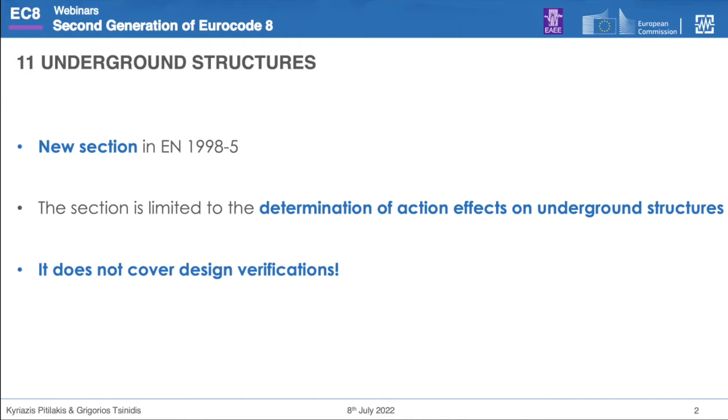It covers these subchapters: the general one, then the seismic actions, the methods of analysis, quite general, and the seismic loading. The first two are for the tunnels, the third one is for large underground spaces like parking and metro stations, which were not covered so far. We also have a small chapter at the end for culverts. So we believe we cover most of what an engineer is needing.

And there are 3 annexes. At the beginning it was 5 or 6, but we reduced it, all informative, to provide simplified evaluation of peak ground motion for the seismic design of underground structures, simplified analytical expressions for seismic tunnels, and impedance functions for underground structures. We will discuss these issues during the presentation.

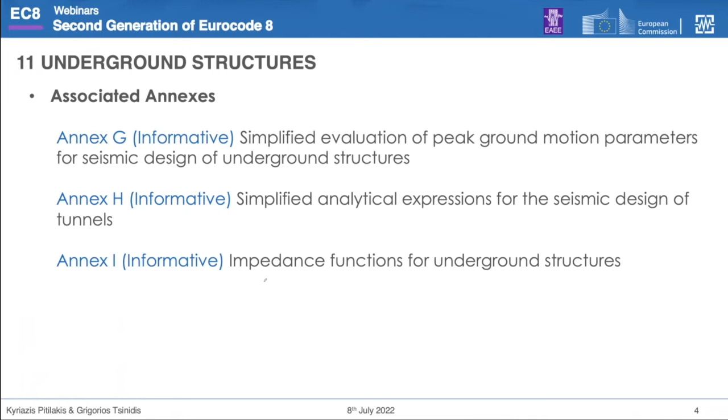Now the tunnels and underground structures shall be designed to provide seismic performance consistent with the limit states we have discussed a lot before, and of course the associated seismic actions. They should be designed against ground shaking and permanent ground deformations.

For ground shaking, the problems are not so important, but for permanent ground deformations, we will see that in most cases the code has the tendency to say: if you can avoid it, please do it.

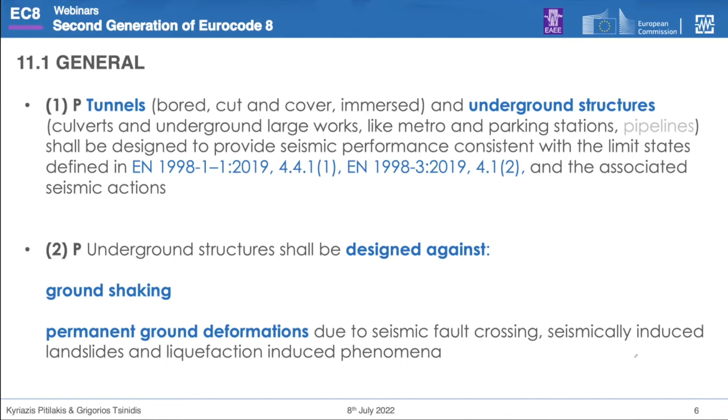Now, an important issue which may affect the design of tunnels is that it is set in a very strict way that tunnels and other underground structures should be primarily designed to accommodate transient and permanent deformations. Why? Because the imposed ground deformations on underground structures are more important than transient seismic loads related to inertia forces.

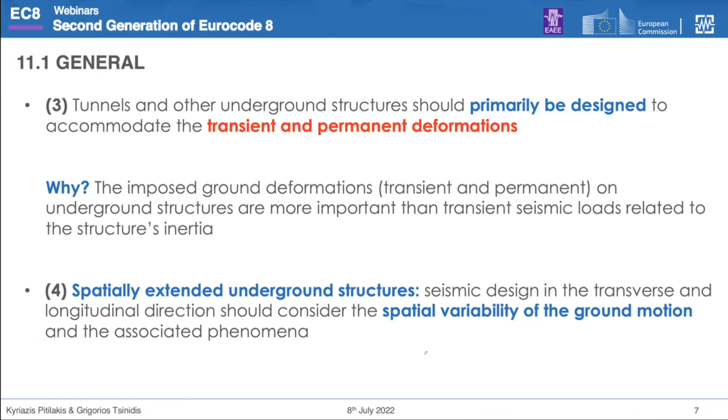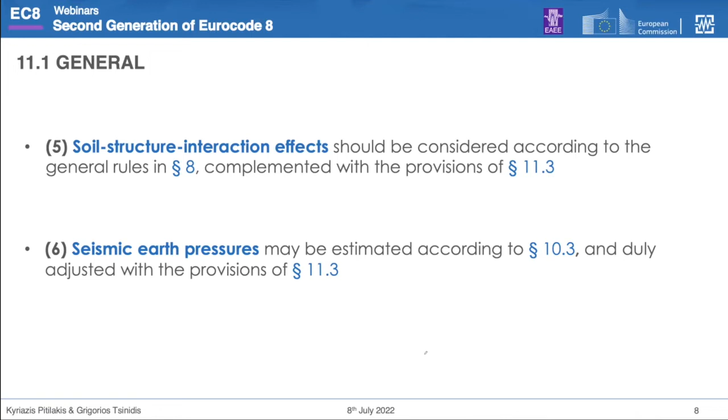It is also said, as for pipelines, that for spatially extended underground structures, seismic design in the transverse and longitudinal direction should be considered, with the spatial variability of ground motion and associated phenomena. Soil-structure interaction effects should be considered according to what has been discussed before by George. And regarding seismic earth pressures, it will be according to what will be discussed after my presentation by Luigi.

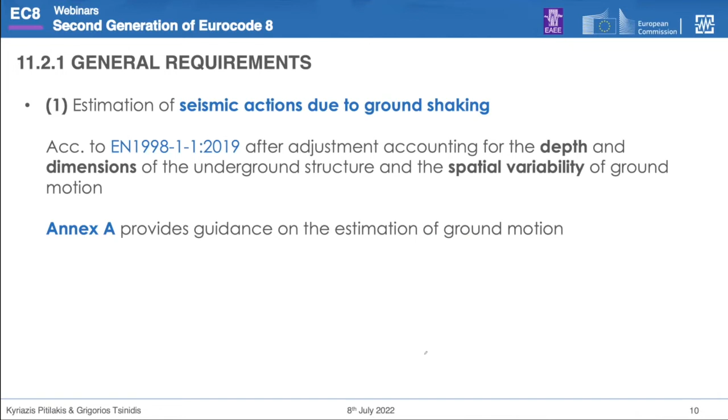Seismic actions due to ground shaking, after adjustment, account for the depth and dimensions of underground structures and the spatial variability. In Appendix A we provide some guidance on the estimation of ground motion. I'm not going through the detailed presentation of what is in the annexes, because it would take a lot of time to explain, and with the time allowed for this presentation it would be impossible.

For active faults, potentially active faults are defined as already stated in part 1 and in this part 5 as well. And we say that the necessary parameters that should be estimated are the angle of incidence, the dip, and the offset at the location of the structure.

In case of precarious slopes, and the problems that may face tunnels and culverts, the most important issue is that we have to be able to estimate the permanent slope displacements. The tunnel should be designed for these permanent slope displacements, and if it is impossible to accommodate, we should avoid this place. This is the basic idea for this design.

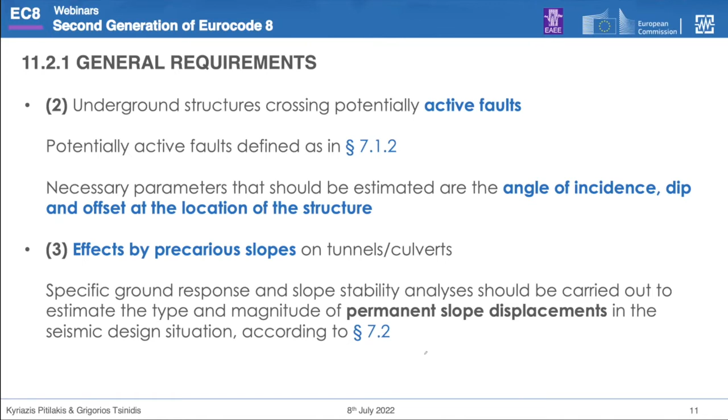Underground structures in potentially liquefiable soils follow more or less the same approach as previously for slopes or faults, but in cases where it is not so critical and you may be able to build a tunnel in liquefiable soil, then you absolutely have to take into consideration the buoyancy effects.

But there is a general clause saying that sites susceptible to hazards such as active faults, precarious slopes, and liquefiable soils should in general be avoided, unless specific design and construction actions reducing the risk to acceptable limits are adopted and made.

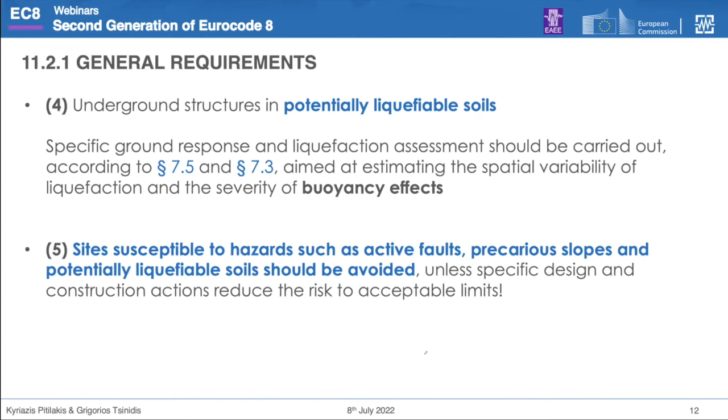Ground motion parameters should be established for the seismic design of tunnels and underground structures, distinguishing between low and moderate seismic actions and strong ground motion cases. In the case of low to moderate seismic action classes, we can use peak ground motion parameters: PGA, PGV, or displacements.

But the problem is that we have to establish, define, and estimate these values in a proper way. So the design response spectra should also be consistent with these parameters.

For the evaluation of the parameters at ground surface, at various depths of embedded structures, and at the depth of the base of underground structures, the designer should take this into consideration. In most cases, a ground-specific response analysis may be carried out to estimate the appropriate figures to use.

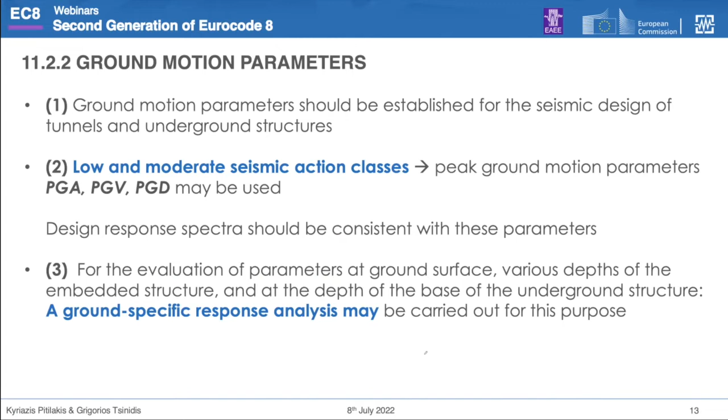For moderate and high seismic action classes, it is necessary to make a ground-specific response analysis for the total length of the structure.

There are some proposals for low seismic actions on how to estimate the variability with depth. A strong discussion in the committee was made regarding the values we could use for PGV and PGD, because they are necessary, and the variation with depth. Finally, we prefer to remain with what is proposed in Part 1, and there are some correlations there that could be used.

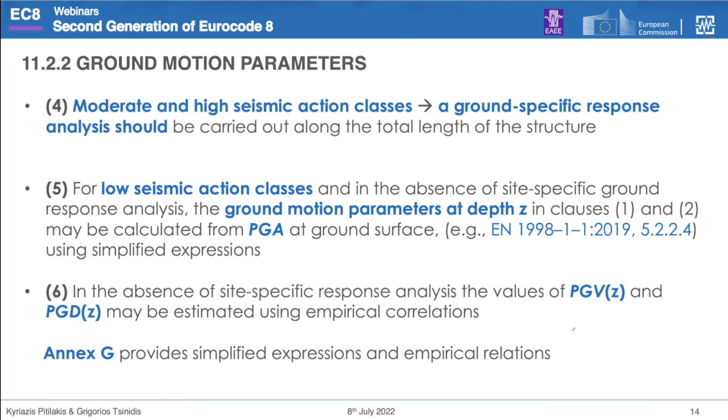In any case, in Annex G you can find simplified expressions and empirical relations on this issue, including recommendations and guidelines for the spatial variation and incoherence of ground motion, something that is also discussed a lot in the part on silos and pipelines.

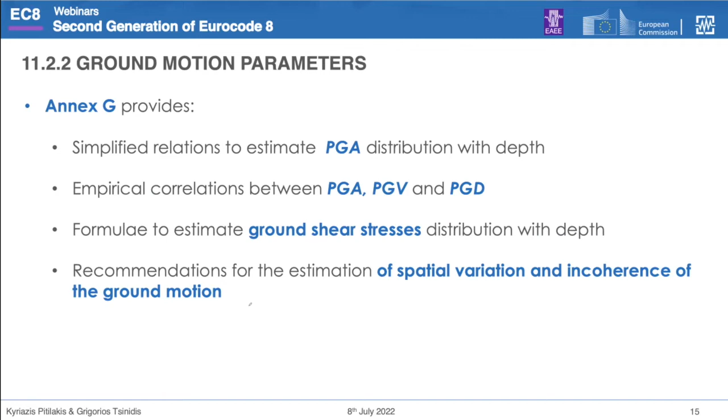For the seismic action in the longitudinal direction of the tunnels, it is necessary to use an apparent velocity, as described both in the annex, and in the way these issues are addressed in pipelines as well.

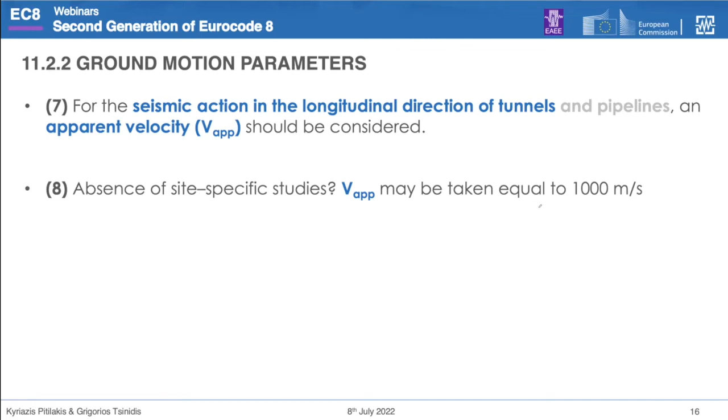In the absence of site-specific studies, which are rather rare I must admit, the apparent velocity may be taken equal to 1,000 meters per second. This is more or less what is proposed in the United States, and we do not have other arguments to modify this. It's a long-debated issue, but this number is believed to be a reasonable one.

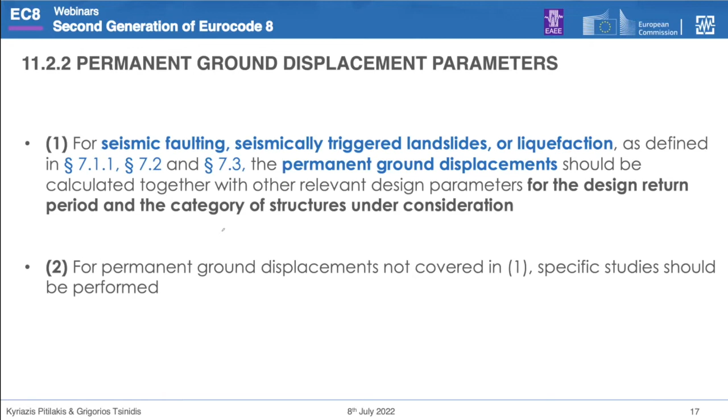For seismic faulting, seismically triggered landslides, or liquefaction, the permanent ground displacements must be estimated, and this is how the structure should be designed. We should take into consideration that these values have been estimated for the design return period and the category of structures under consideration.

Methods of analysis: for the seismic design of underground structures, the transient effect of the seismic action may be expressed either as forces in the transverse direction or as ground deformations in both directions. The effect of seismic action due to permanent ground deformation should be expressed exclusively in terms of displacements.

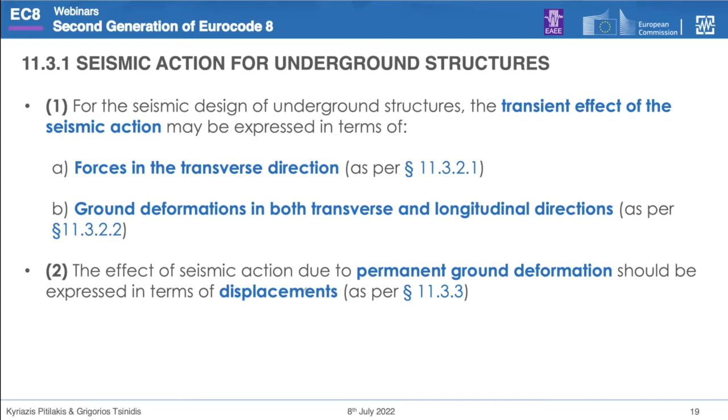An important note is that we can use the seismic earth pressure acting on the structure in the transverse direction. However, we must be quite careful, because these methods should be used with a certain precaution, and in general they should be used for shallow tunnels, cut-and-cover structures, etc., not for deep structures.

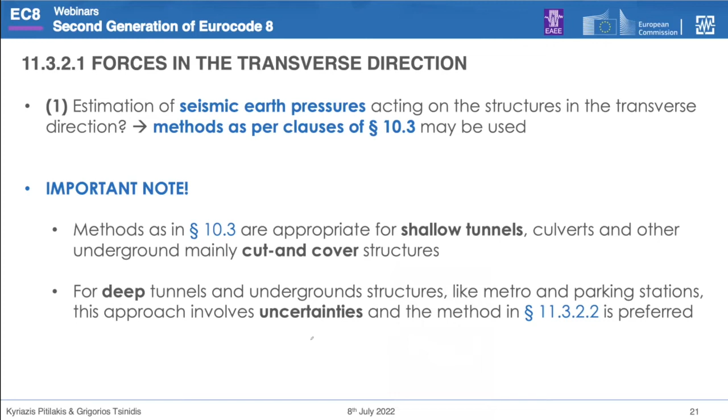For deep structures, if we use the formulas or expressions presented for retaining structures, it may involve huge uncertainties. So the methods mostly referred to in this clause should be used instead of the more classical ones that have been used until now for applying seismic earth pressures.

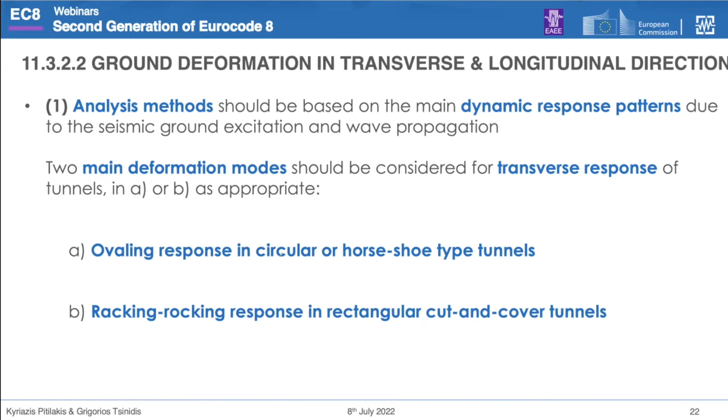The analysis method should be based on the main dynamic response patterns of the structure. The main deformation modes in the transverse response are the ovaling and the racking response, among the three or four figures I will present. This is the ovaling situation, and this is the racking and the rocking.

In some previous international codes there was only the racking effect, which is actually a shear deformation applied to this kind of structure, also used for underground spaces. But recent studies, not only here but elsewhere, have shown that in many cases we have a kind of rocking as well, so the analytical expressions for estimating internal forces in these situations now consider both racking and rocking effects.

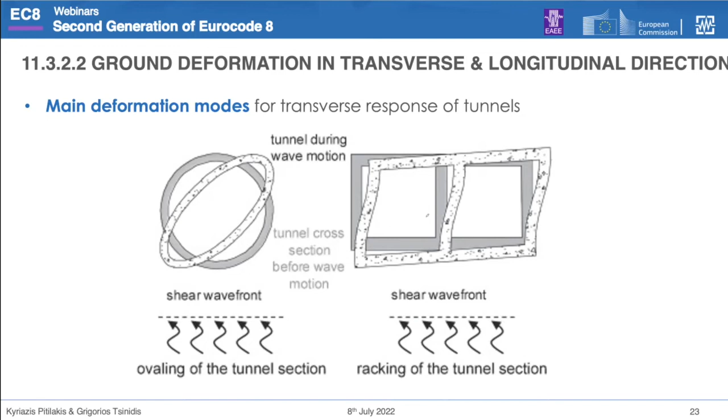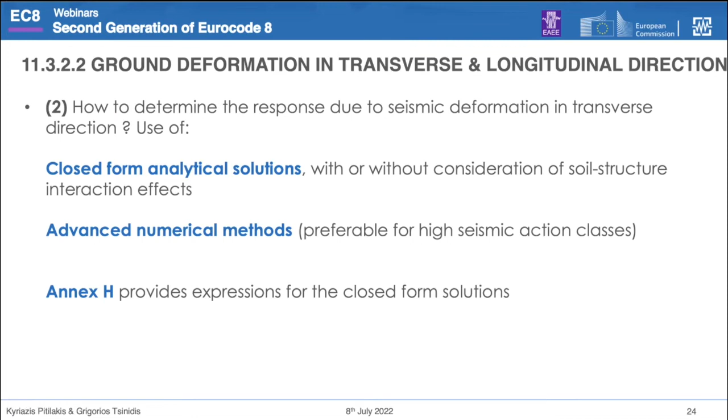For ground deformations in the transverse and longitudinal directions, we can use closed-form solutions, with or without considering soil-structure interaction, or advanced numerical methods, 2D or 3D, which is preferable for high seismic action classes. In Annex H, we provide expressions for closed-form solutions, which could be used in many cases, at least for preliminary analysis and beyond.

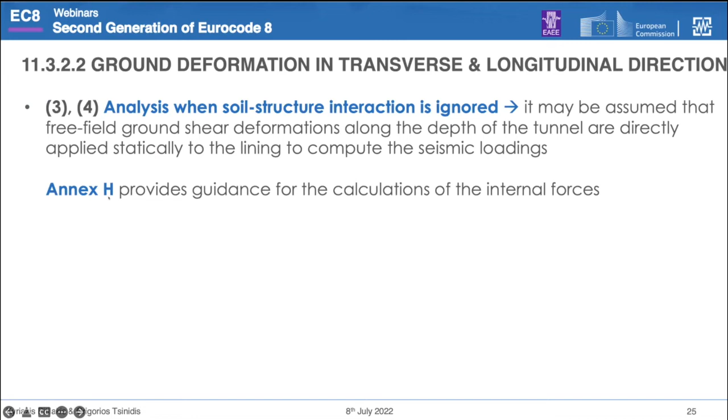If soil structure interaction is ignored, it may be assumed that the free field ground shear deformations along the depth of the tunnel are directly applied statically to the lining to compute the seismic loading. In Annex H, we provide guidance for the calculation of internal forces if we have to use soil structure interaction effects, for both circular and cut and cover structures.

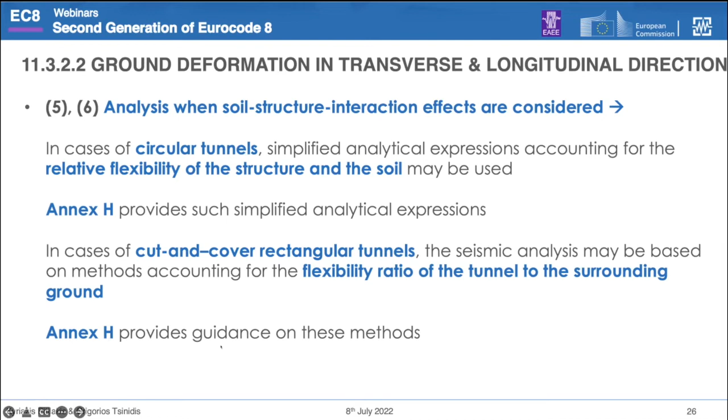Simplified analytical expressions accounting for the relative flexibility of the structure and the soil may be used, and we provide simplified expressions in the Annex. In particular, for cut and cover rectangular tunnels, this is based on the so-called flexibility ratio related to the surrounding soil. It is a methodology used for several decades now. It has been somehow improved and updated, but the essential idea is the same, and in Annex H we provide guidance for these methods.

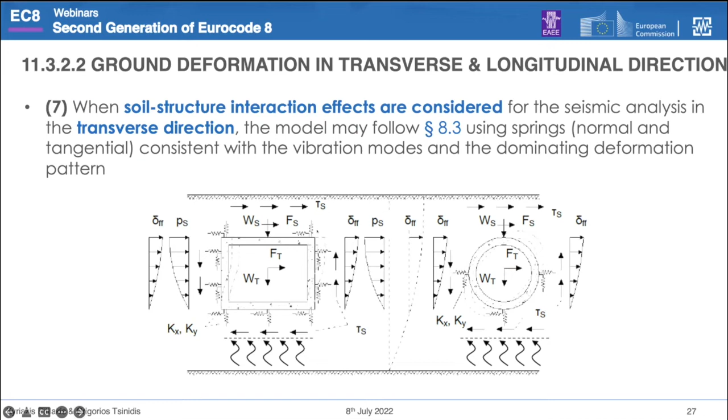What is important here is to take into consideration the inertial forces, the forces around the perimeter where structures are embedded, the type of underground structure, the deformation modes, and the seismic strain amplitude for the design ground shaking and the soil. We provide guidance for the calculation of this.

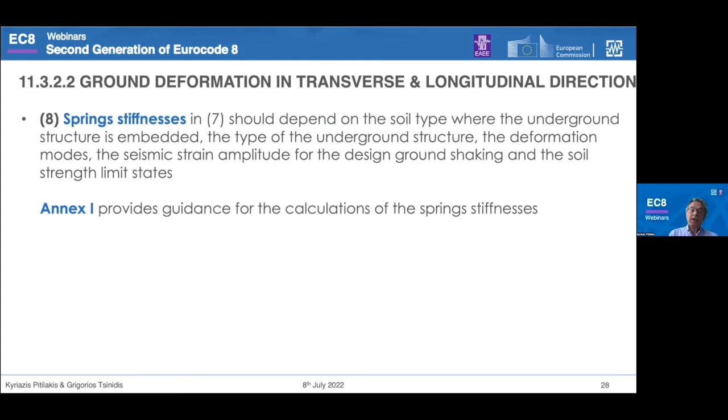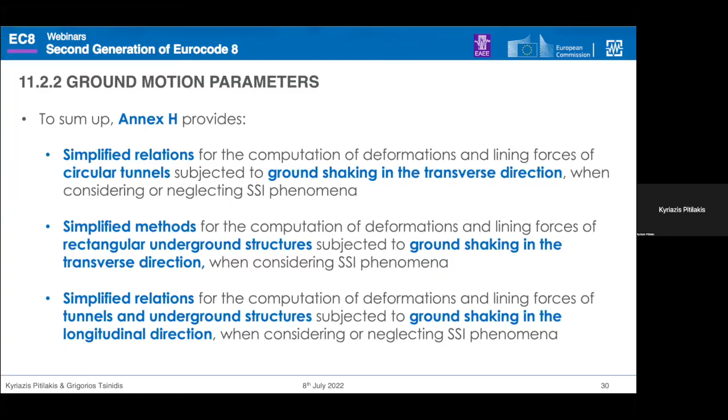I must say at this stage that there are quite a lot of uncertainties behind the estimation, but we decided to give some guidance. We must be very careful in the estimation of the spring values, the stiffnesses, and as I said in the previous slides, this is more or less what is included in the annexes.

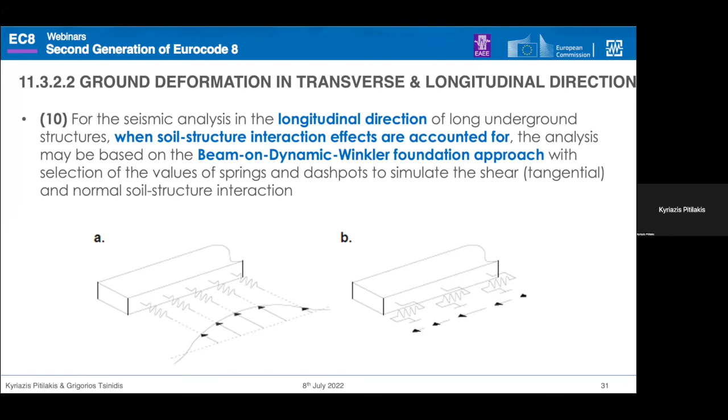Now, for seismic analysis in the longitudinal direction of long underground structures, when soil structure interaction is accounted for, the analysis may be based on the beam on dynamic Winkler foundation approach, with a selection of appropriate values for springs and dashpots, taking into consideration the tangential and normal soil structure interaction.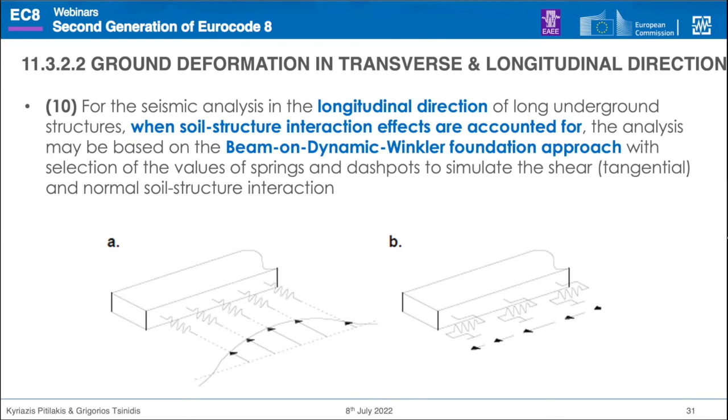Again, the values of the springs are long debated. We propose some numbers as a way to estimate them, but we emphasize that engineers should be very careful because the uncertainties may be quite high. This is addressed in Annex I, which provides guidance for the calculation of springs and dashpots.

We also put in a general comment saying don't worry too much about soil structure interaction effects in the longitudinal direction, at least, because in general this reduces the internal forces in the lining. So to be conservative, even if we don't take this into consideration, we are probably on the safe side.

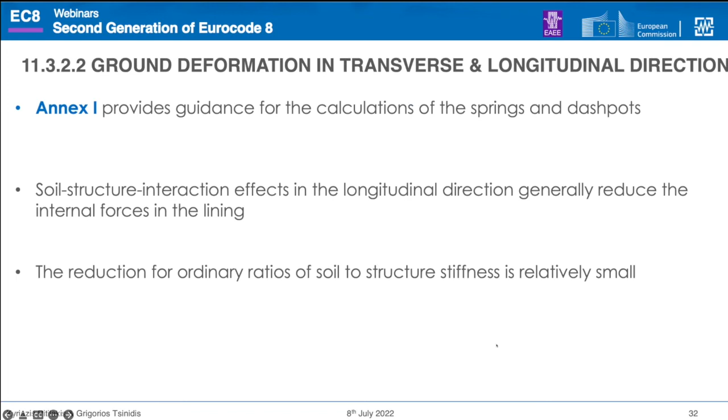For permanent ground deformations, we generally say that this is the greatest risk for underground structures. In general, it is not easy to design underground structures to withstand large permanent ground displacements. For tunnels it is easier, but for underground structures, as we will see, it is not so easy.

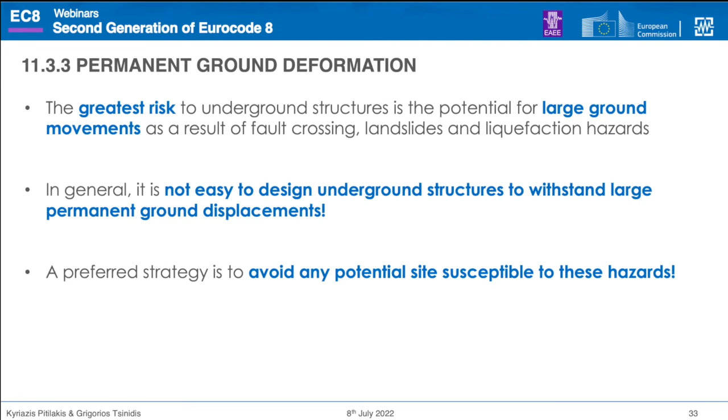But even for tunnels, we have to find other solutions, as we discuss next. Empirical relations are proposed for landslides and for liquefaction as well.

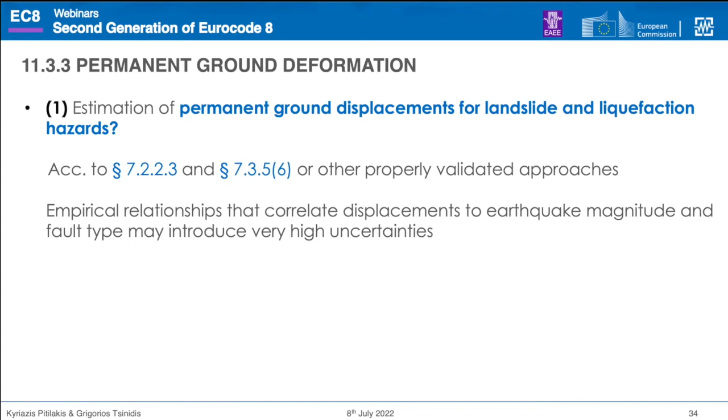Buoyancy is probably the main problem we should consider in the case of tunnels crossing liquefiable sites. And in all these cases, we more or less force the engineers to find a solution, either to avoid the issue or to take mitigation measures that should be applied.

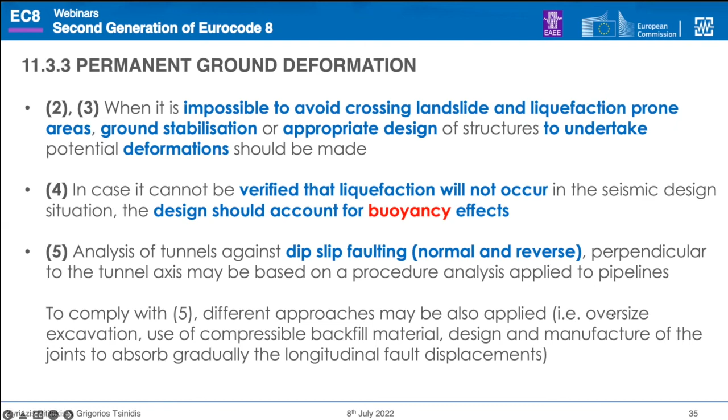What is important here is that there are some methods and technologies to have joints that can accommodate this longitudinal deformation of the tunnels, but this cannot be prescribed in detail in a code. We just say that in cases where you have to face this kind of longitudinal deformation, special devices should be designed according to the way the tunnels are constructed. So it is something that is allowed, but the engineer has to take these issues into consideration.

For strike slip faulting, the countermeasures are similar to the previous case and should be considered in order to minimize the consequences. The estimation of the spatial distribution and attenuation of the maximum fault displacements along the tunnel is a very difficult issue to estimate correctly.

So we have to use empirical relations. In many cases, it is proposed to use 2D and 3D numerical approaches in order to simulate the evolution of the deformations along the tunnel. This is particularly recommended and preferable for high seismic action classes and for segmented tunnels.

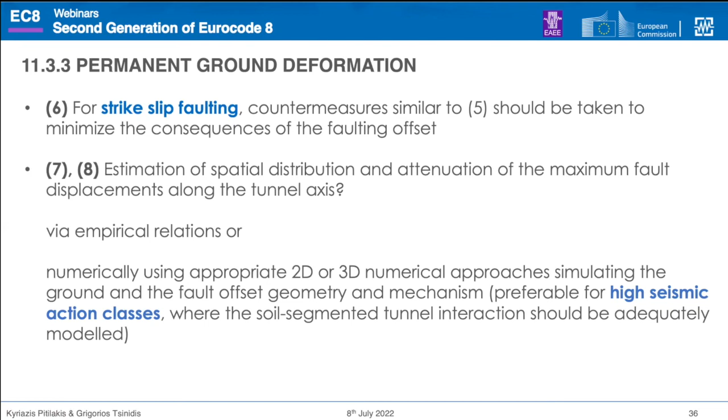I'll discuss a little bit the problem with the joints. We say that joints of segmented lining should be able to accommodate the permanent ground displacements along the tunnel on both sides of the faulting. Joints having special design features and capabilities should be used in these cases.

But we cannot rely on this kind of solution where displacements are higher than 80 centimeters to 1 meter. In this case, it is rather difficult to structurally accommodate the imposed ground displacement using specifically designed joints and other solutions. So this limit of 800 to 1000 millimeters is somehow the limit up to which we're allowed to use this kind of solution.

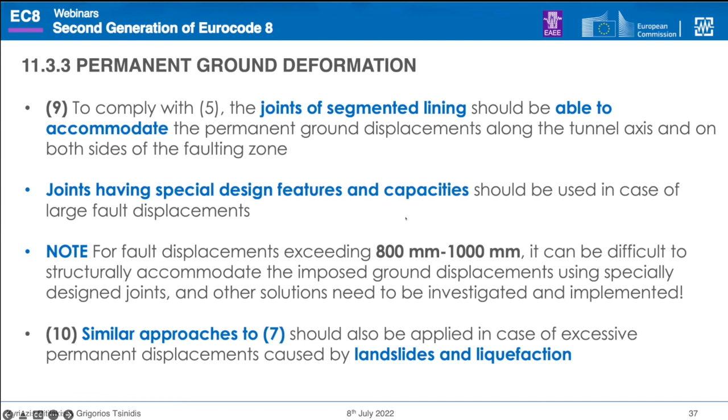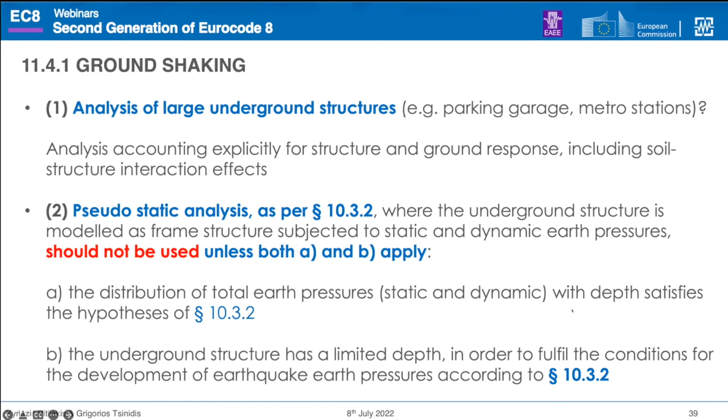Now, for underground structures like parking stations, the main idea in the code is that the analysis should include soil-structure interaction. Pseudostatic analysis, as described in the next presentation, may be undertaken, but only if it meets two conditions: the distribution of total earth pressures, static and dynamic, with depth satisfies the hypothesis imposed in section 10, and the underground structure has a limited depth in order to fulfill the conditions for the development of earthquake earth pressures, again according to section 10.

Large underground structures subjected to seismic shaking may be analyzed using a two-dimensional frame spring model. Annex I provides the specifications for this. Again, the problem in this case is how to estimate the springs - they should be compatible with the strains.

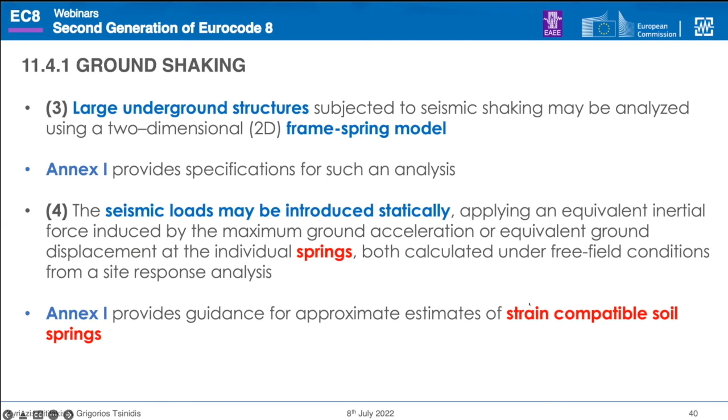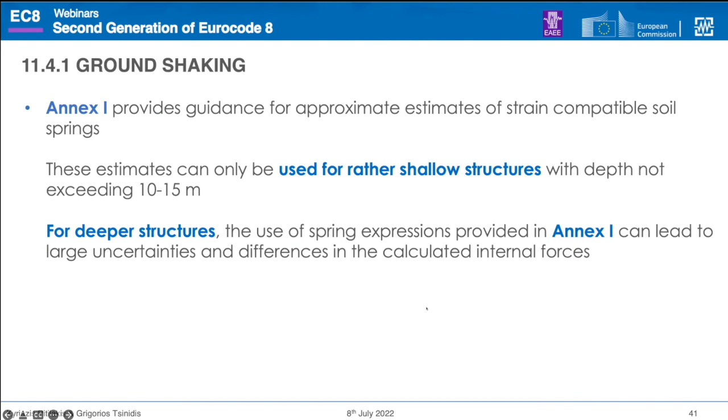We may have important uncertainties with regard to the estimation of soil springs in this case. There is a note saying that this estimate can be used with certainty for rather shallow structures, not for deep structures - we set the threshold at 10 to 15 meters.

For ground shaking of underground structures in high seismic actions, a full dynamic analysis, 2D or 3D, with a coupled soil-structure system is proposed. Ground and structure properties should be simulated across a wide range of strains.

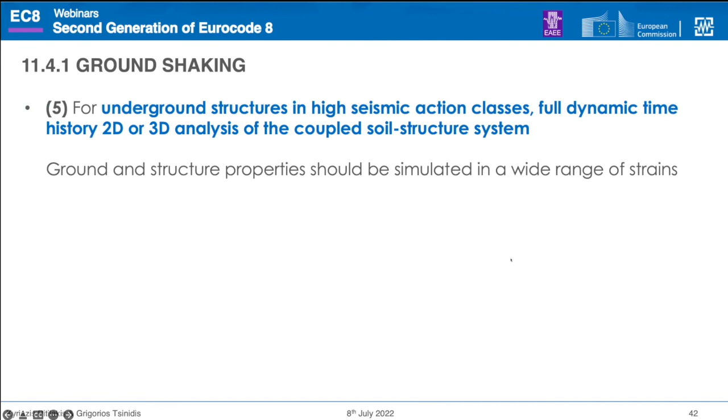Large underground structures cannot accommodate moderate to large permanent ground displacement. So in this case, we have to relocate the underground structure elsewhere when we have seismic fault failure. It is very, very dangerous, and the code is very strict about this.

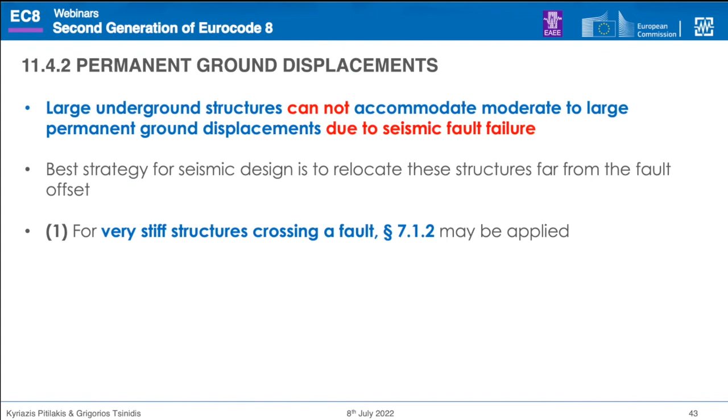Now just a few comments about culverts. What's important to say here is that these may be either rigid or flexible, and in general we can use them if they are not very long. They are particularly vulnerable to permanent ground deformations. Effects of transient ground shaking may be neglected for culverts if their span is less than 2 meters.

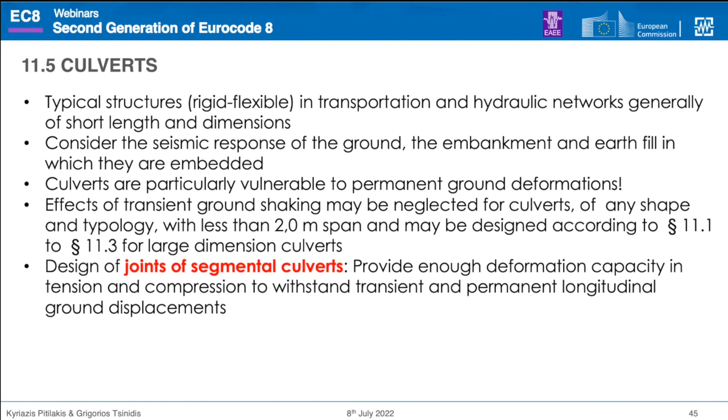What is very important, in order to accommodate deformations of the backfill etc., is the design of segmental culverts. With this, I think - and despite some problems that I had, I apologize for this - thank you very much for your attention.